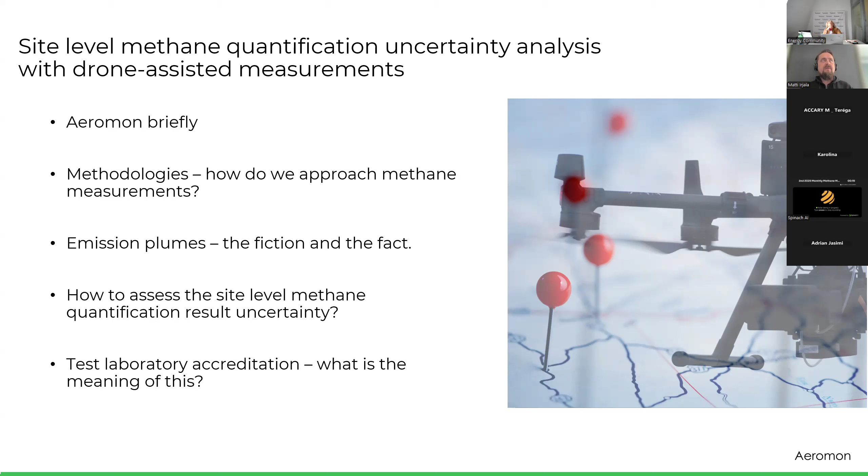Okay, so starting from Aeromon first, briefly. We are a company founded in Finland soon 11 years ago. From the beginning, we started to develop drone-based measurement methodologies and also payload, so analyzer technology, which is light enough that it can be carried with a drone. And during the years, the scope of the industries has varied from maritime to process industries, and now the majority of our work is from the oil and gas industry due to the regulation. We provide measurement services, so basically end-to-end service is possible through us. In some cases, we also work through our partners, but as such, we don't sell hardware, but services. Aeromon holds a certification for ISO 9001 together with accreditation for ISO 17025 test laboratory. And that we will discuss more later on.

Okay, so the reasons why we are typically measuring at our customer sites are that the customers want to understand their fugitive emissions, where they come from. Are they possibly a risk to health and safety? And then, of course, if these emissions can be quantified, this is also done. Typically, the spreading and dilution is also studied in cases where, for example, the odors are annoying the surrounding population. Also, process monitoring is typically one aspect that is studied because the quantification is holistic and covers full process units one by one. So adjusting processes between the measurements, you can get real-time feedback on how the process adjustments affect the actual emissions from that specific process unit.

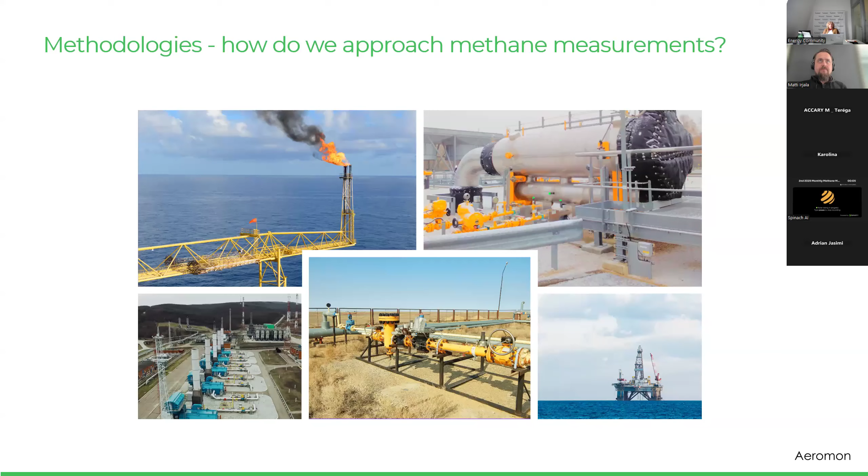Good. Now, let's take a look at the methodologies. How do we approach methane measurements? So, it's very common that the work starts with a mapping. And a mapping is done to understand where the emissions are actually coming from, to identify the hotspots that might need extra attention and might affect the measurement planning or the strategy that we have decided to use in the field for the data collection.

Emission mapping can be done purely horizontally, or it can be done through the emission fence line monitoring, where for example, in tightly built refinery type of environments, we measure in between the units to differentiate which emissions come from which units and so on. This can be further processed to the site level quantification, also section or even component group level quantification, but mainly as an end result, we always come out with site level quantification. Also, the flare efficiency monitoring is part of the spectrum of measurements for methane.

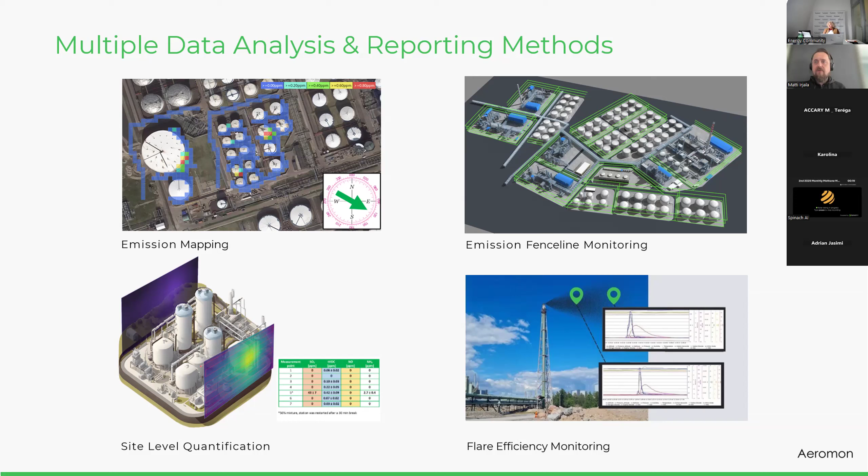And let's first take a quick look on the site level quantification. We can apply two different quantification methods here. The reverse dispersion modeling or inverse dispersion modeling, whichever way you want to call it. This was the first methodology that we ever tested, whereafter we moved to the mass balance approach, which is not a modeling approach, but a direct measurement.

So in reverse dispersion modeling, one needs to know where the source is, what is the type of the source, is it a point source, an area source, or a flare? And moreover, there needs to be some assumptions related to the topology of the source, temperature of the source, the speed of the gas flowing out from the source, and so forth. So there are typically a lot of assumptions.

The mass balance approach is often used instead of reverse dispersion modeling or inverse dispersion modeling due to the fact that it includes no such assumptions. Also, it is a direct measurement of the concentration and wind field, both upwind and downwind of the measurement area or the section that we are quantifying.

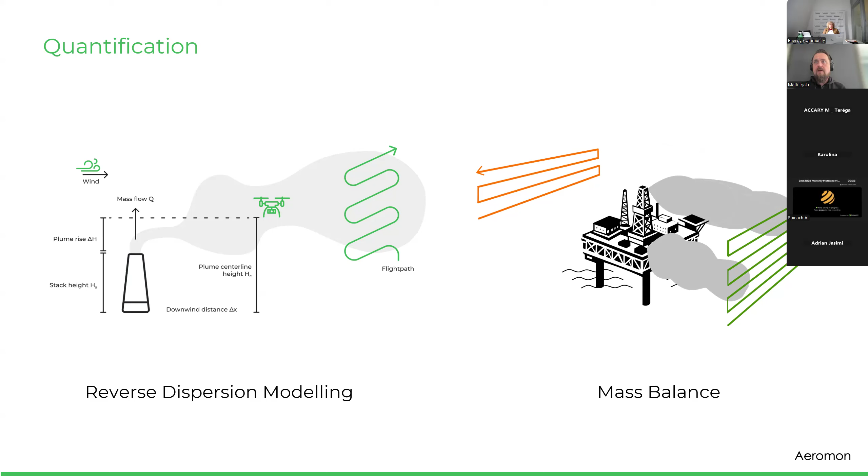The mass balance also goes with other names. It can be called the conservation of mass, or it can be called a flux plane, or anything similar to that. In all these cases, the methodology is a direct measurement of wind and concentration, and it is at the end a mass balance approach.

For flare measurements, there are several different possibilities, also different outcomes. So a straightforward solution is a mass flow rate measurement of methane from the flare. This will result as a simple mass flow rate result. But if that result is combined with process information on what is the methane flow into the flare, this information can be further analyzed into a methane destruction efficiency result from that specific flare.

Also, there's a possibility to do a concentration measurement, which is not a mass flow rate measurement, for different compounds coming out from the flare plume. So measuring methane and carbon dioxide, also possibly alongside other carbon products such as carbon monoxide or non-methane volatile organic compounds can be joined into the same measurements. The outcome of this measurement is the flare combustion efficiency result, which is a comparison of combusted and uncombusted carbon atoms basically out from the flare.

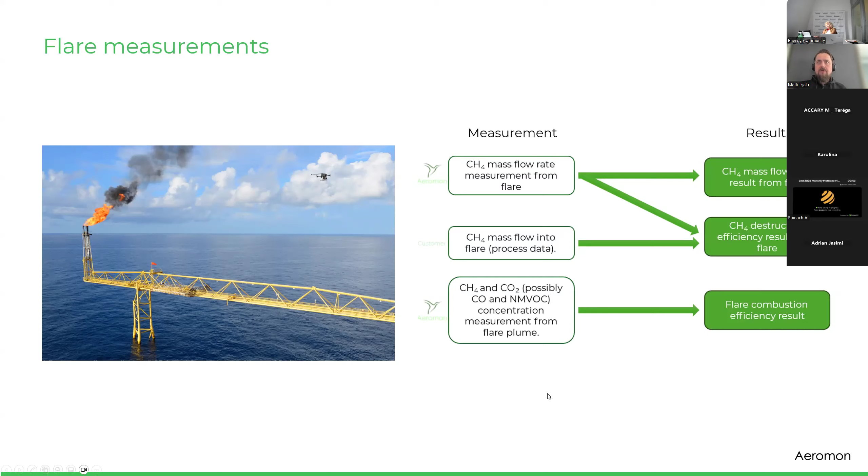This is actually a probability distribution on from where to locate the plume, especially if you are in the near field of the source, meaning that you are closer than a few hundred meters from the source. Moreover, this sort of standard theoretical plume behavior can turn into different variances, depending on the temperature gradient and depending on the wind conditions.

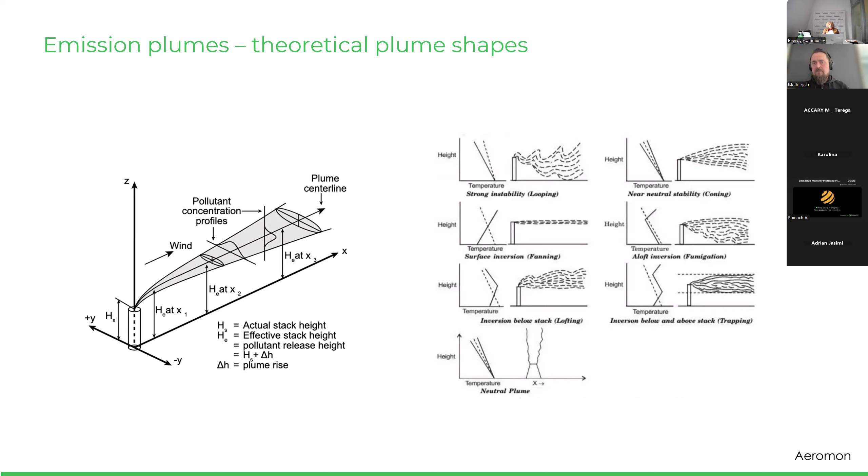So this Gaussian plume can behave as shown on the right-hand side, depending on the conditions. It can be a looping, coning, fanning, fumigating, lofting, trapping, or a neutral plume. Now, when these types of theoretical plumes meet real-life circumstances and turbulent mixing, they start to form out as realistic plumes. So all these examples in the previous slide more or less assume a somewhat laminar flow of the wind field.

Now, especially if we are considering onshore measurements, we have trees, we have geography, we have hills, we have buildings. Of course, buildings exist also offshore, but otherwise the situation is slightly different. But this turbulent flow will cause turbulent mixing. And this is the first step where typically the modeling approaches can turn difficult for the quantification. So the uncertainty budgets and the assumptions needed for modeling in a case of turbulent mixing can be quite complicated.

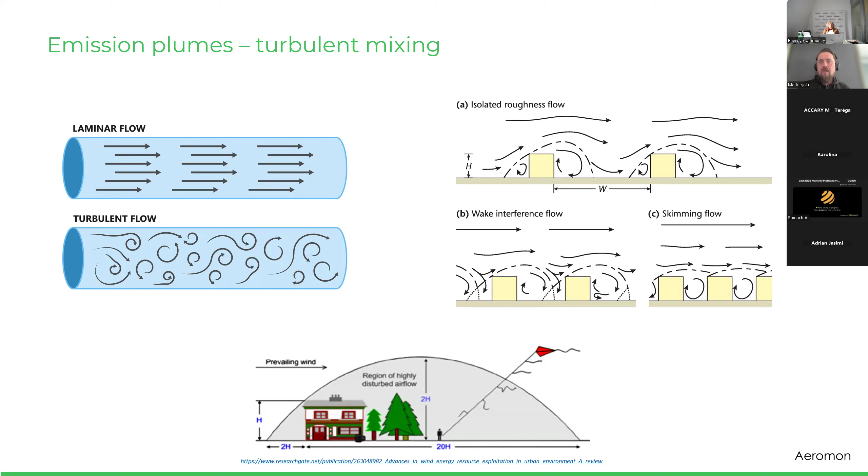Now, when all this is considered, the actual plumes may appear quite complicated. They may appear visually to actually go in different directions, especially in the near field. If we have a satellite view of some concentrations, this is an example of a methane plume seen from space here on the upper right-hand side. And you can see that there is nothing Gaussian about this plume. It's more arbitrary. Of course, it's going towards the prevailing wind direction, but other than that, it behaves in quite a complicated manner.

Here at the bottom, we have a cross-section that we measured from a plume. And this was a multi-source area, not too big, maybe 50 times 50 meters roughly, that included 4 to 5 point sources. And these are just 2 consecutive cross sections of the plumes coming from that area. And from here we can see that the plume behavior is complicated.

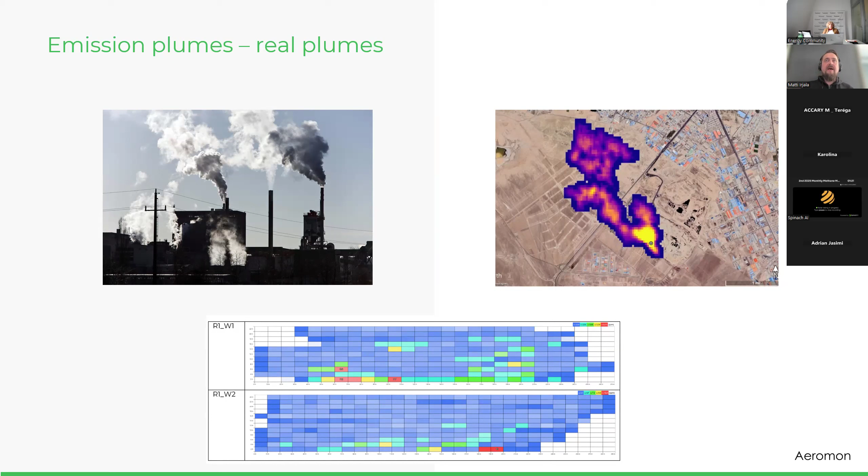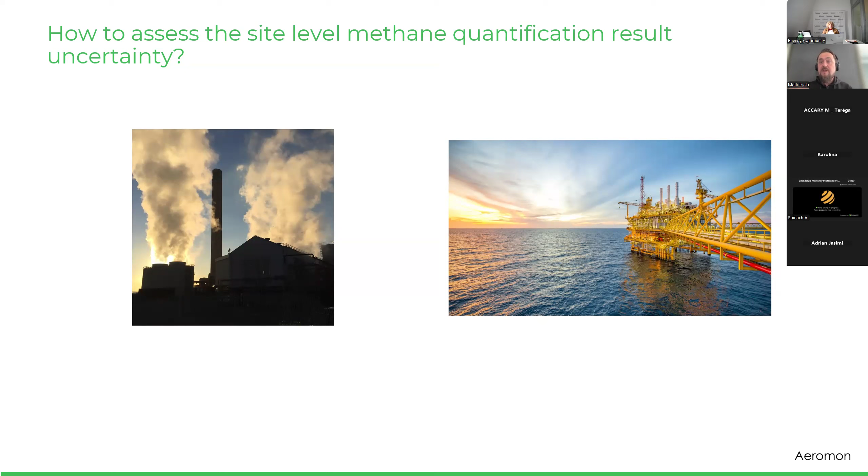Now that we have an understanding of how realistic real-life plumes actually behave, let's start to assess some quantification uncertainty. Because with site-level measurements, it doesn't matter if the measurement is done with a drone or with a car or with the DIAL or with the SOF. With all these methods, what everybody is measuring is the plume cross-section, basically, in one way or another. So all these principles more or less touch all these methodologies, not only drone-based methodologies.

Before we go further, let's just separate uncertainty and accuracy or error from each other. So uncertainty of a measurement result acknowledges that no measurement is actually perfect. And uncertainty defines a group of values that could reasonably be linked to the actual result that was measured in those measurement conditions. So it's a population of results that might be true with the results that we have for that one individual measurement.

Then accuracy is a difficult parameter in the sense that it requires the actual flow rate value, because accuracy is the closeness of the measurement results and the actual mass flow rate at the source.

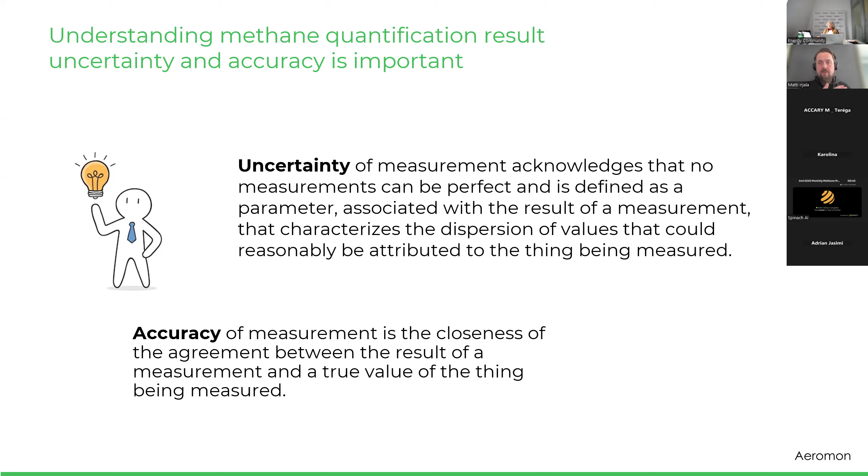This can be also often referred as an error, which is the distance between the reported value and the actual value. Accuracy and error are something that are well present, typically in controlled release studies. However, in actual production measurements, it's not typically available. And there, of course, we then have the comparison between the bottom-up and the top-down measurements.

So as we already saw from the actual plumes, the real-world atmospheric airflow is complicated. And measuring compounds that this airflow carries is not trivial. It's actually quite dynamic. So in order to have representative results and uncertainty that is meaningful to the result, there must be a link between the dynamic conditions during the data collection, during the measurement, and the result. And how this happens is that you actually have to master your entire measurement strategy in order to have that traceability to the conditions that were prevailing during the data collection.

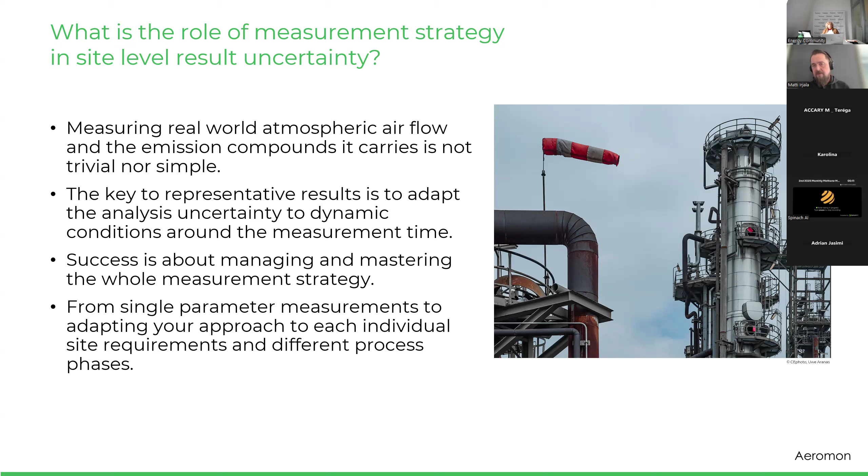And this touches every single parameter that is used for the analysis. And for us, typical parameters that are used for analysis are not only the methane concentration or wind speed, but also wind direction, the location, altitude, and then depending on the measurement details, also timestamp, of course, and so forth. So measurement strategy must be mastered so that one can have a reliable uncertainty budget. This means that there are now two different approaches that I wanted to show in this slide. Let's start with this measurement strategy circle here.

So in order to have the measurements in a traceable manner so that they can be reported in an understandable way, to be well documented and representative, when you're measuring your concentration, you need to have an understanding of what are the movement speed and spatial resolutions that you're using for that concentration measurement. And how do you log your three-dimensional location and timestamp related to the concentration measurements? And then how do you collect your wind data related to your concentration measurements? And what is the sampling rate of everything that you're measuring?

How do these relate to the source area that you are trying to quantify? And what is the process phase in the process area? Is that process phase representative of the actual yearly emissions, or is it possibly an anomaly at the moment? All this needs to be continuously handled during the data collection. And as we all know, it all starts with a plan.

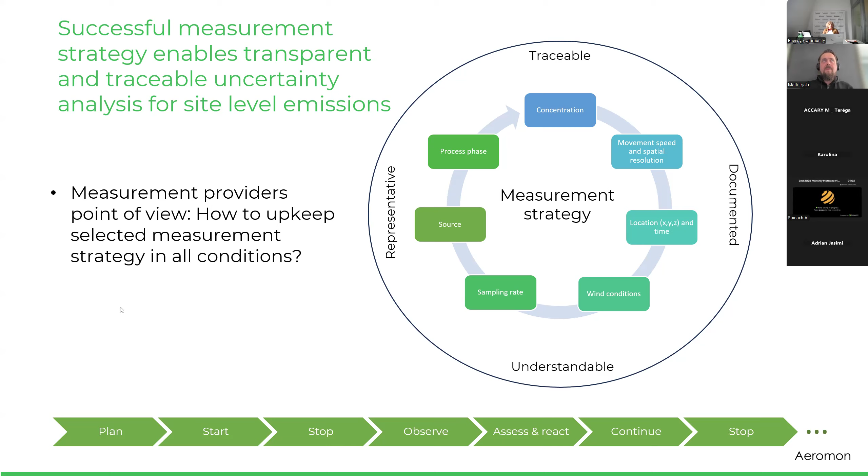Now, the factors that affect the site level quantification result uncertainty. In our case, we have chosen to follow the principles of the CEN technical standard 17660-1 for the concentration measurements. And the reason is that this is the only available technical documentation for sensor system uncertainty definition. It doesn't actually cover methane, but it's the best available standard for this task at the moment. So here, it means that we actually perform performance tests on our analyzers and sensors frequently.

We also have accredited reference gases in our laboratories, which we use to compare the small field calibration cylinders, which we can then send into the field. So in case we need to do a field calibration and test the calibration levels in the field, we still have the connection to the accredited standard gases in the field with us.

Then, in addition to this expanded sensor uncertainty, what affects the result uncertainty is the concentration level in relation to the system detection limits. This means that the closer we go to the system detection limits, the higher the concentration uncertainty actually is. So this concentration uncertainty is not a constant value throughout the measurement range, but actually the closer we go to the detection limits, the more this uncertainty grows.

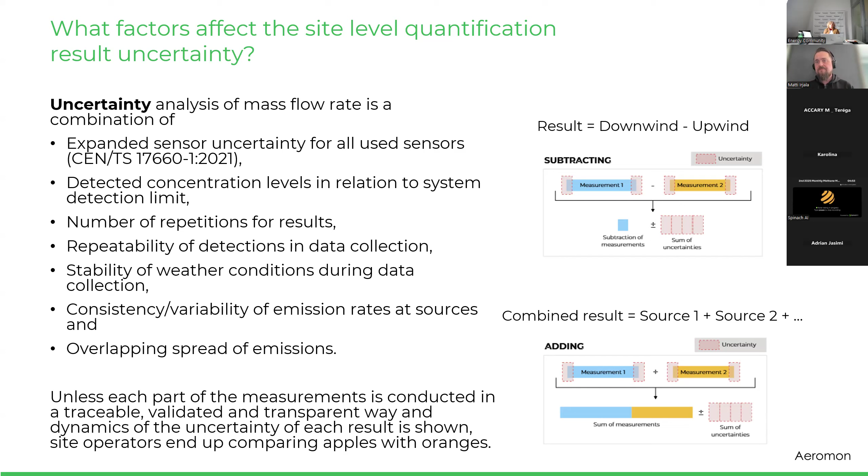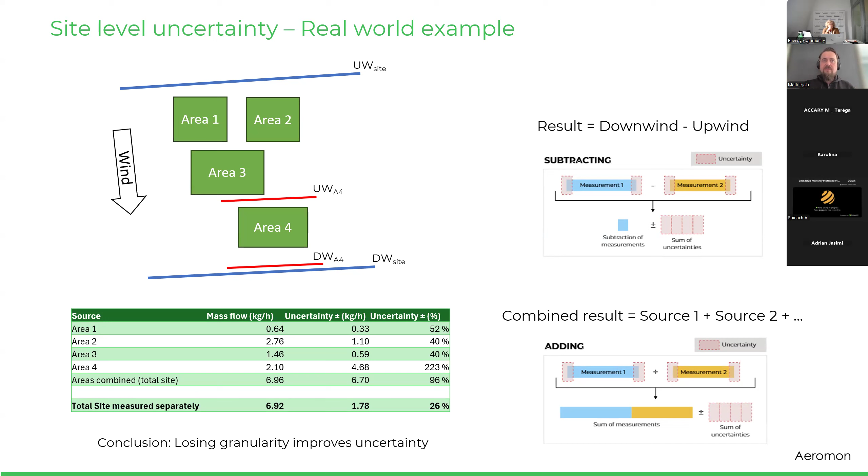And now, if we compare that to the analysis where we measure the entire site as a whole, we can see that the actual mass flow result is the same, but now the uncertainty is 26%, which is a quite typical uncertainty level that we get in normal conditions. So the conclusion here is that in quantification, losing the granularity improves the uncertainty. However, as we well understand, there must be a compromise between them.

Because if we want to improve the site level reporting and get as much value from the site level quantification as possible, you should also have visibility to the source areas and understand the fraction of emissions from different sources. Because if the reconciliation shows that there are differences between the bottom-up and top-down measurements, having this visibility can help a lot in understanding which sources are the reason, and whether these sources are, for example, variable. Of course, it's always beneficial to have synchronized bottom-up and top-down measurements in order to mitigate as far as possible these variable sources and such behavior.

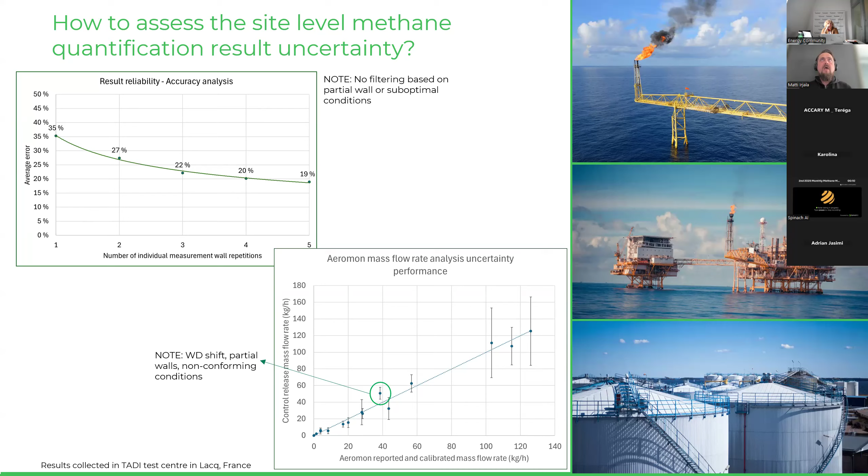Now, what is the meaning of accreditation in relation to the uncertainty assessments of the site level measurements? In Aeromon's case, it means a continuous collaboration in research projects, which has been very essential for us to build a track of evidence to show that we are able to continuously improve not only in results provision, but also in the realistic uncertainty assessments. We also have an in-house team of atmospheric physicists who work continuously to improve the methodologies that we use.

But here you can see a quick glimpse of development during the first years of the mass flow rate quantification, starting 2021 from this GERG study, where we were heavily overestimating, moving towards the next year, where we were not too heavily overestimating anymore, and the number of results meeting the real value with the uncertainty budget was notably increased, but still maybe not as good as it could be. Whereafter moving forward, getting much better fits and also much better meets of the uncertainty budget with the real values. And then moving, of course, towards the image I showed you in the previous slide on where we are today.

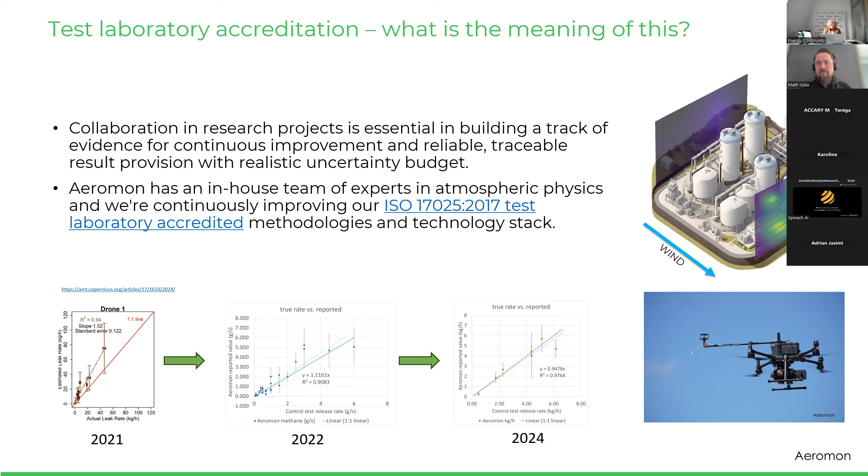The laboratory accreditation that Aeromon has includes measurements of such parameters as location, and then gas compounds such as carbon dioxide, for example, methane, and many others. Then wind speed and direction, ambient temperature, pressure, and relative humidity. And then the results that we derive from these. So direct results such as concentrations or wind speeds or wind direction, localization of emission sources, which is of course an interpretation of data, mass flow rate quantification, then the combustion efficiency and the methane destruction efficiency from the flares.

And when a service provider is accredited, it means that the reporting is audited and validated by a third party. It also means that all the methodologies that are utilized in order to collect the data for reporting are also audited. The reporting is quality controlled, representative, and traceable. It's transparent and as reliable as it can be. That means that it's accredited.

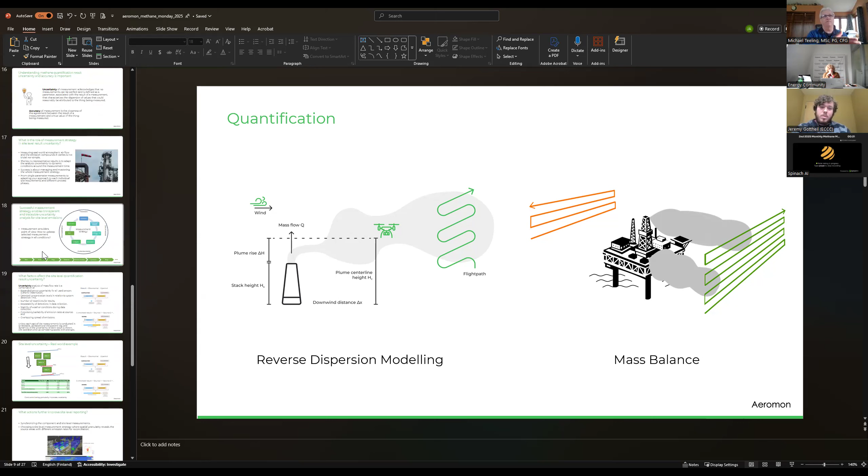The question I have is, coupled with the planning, using the correct sensor type. For the analysis you've performed here, is that based on tuned laser spectroscopy, so more of a passive sensor, versus an active LiDAR sensor? Because one of the things we've done most recently, and I'm not at liberty to divulge the location, I believe someone used the incorrect sensor. The conditions were not right, and the reconciliation was literally impossible. Led to no overlap. So could you speak to sensor type choice?

Yes. So at Aeromon, we decided from the very beginning that we are sensor agnostic, which means the hardware we developed is more like a universal sensor platform. From the beginning, we have tested all the available methane sensors that we could consider for a sniffing method, using a sample pump, extracting the sample, introducing it to a sensor, and measuring the concentration. We tested NDIR, metal oxide semiconductors, and around 5 years ago, when tunable diode laser spectrometers started to miniaturize, we tested them, and the combination of detection limits and selectivity is why those have mainly been used by us since then.

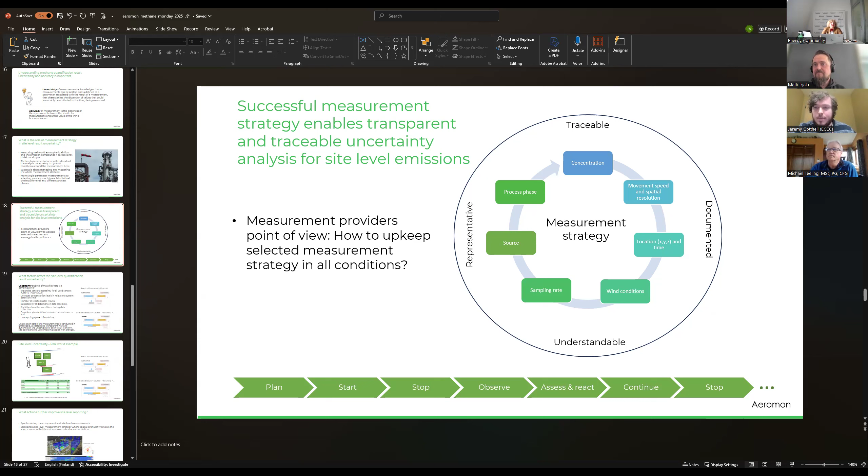Appreciate it. Thank you. Yeah, thank you. I have a few questions actually, because after Jeremy and Michael asked the really expert questions, I have more like beginner's questions, just to clarify.

So in all these services you're doing, different types of equipment are used, I believe. You mentioned drones, but as a service provider you use them all, not just drones? Yes, that is exactly correct. This universal sensor platform that we have developed and use in our data collection is something we can carry with a drone. However, drones for us are just a sophisticated ladder, if you may. We can use bicycles or extension poles, or we can collect data just by walking.

The measurement equipment itself doesn't know if it's carried by a drone or by a human hand. It just collects geospatial data with a timestamp. So yes, we use the sensors for the data collection. We use weather stations: we have a stationary weather station, and if we use a drone, we have an additional weather station on board the drone too, so that we understand the local wind field better. It's also used for the mass balance analysis, but we provide all this.

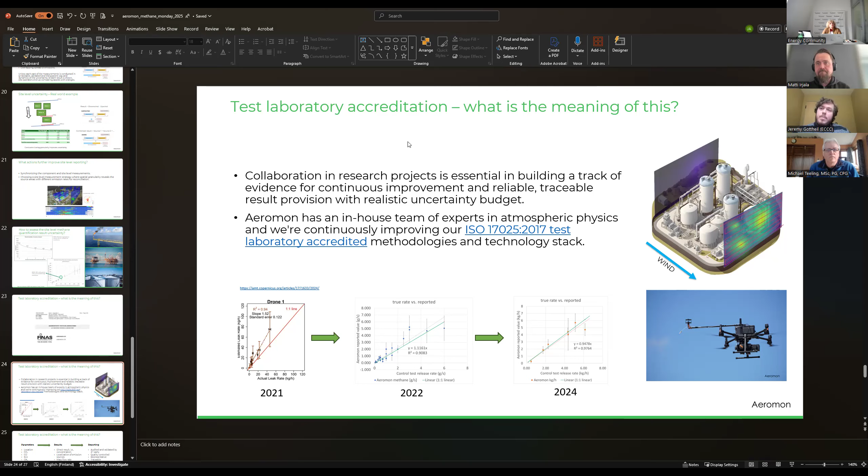Thank you. And then one more question for beginners like me. So it's possible to measure different gases in one go? Yes, this is correct. And then to see what is methane, what is CO2, and so on? Yes, correct.

The universal sensor platform that we utilize in the data collection, it is quite typical that in these types of methane measurements, we have the methane sensor that we accompany with a carbon dioxide and carbon monoxide sensor, because we use them in one and the same dual module. And moreover, we can put in the non-methane volatile organic compound sensor in case there would be potential for longer hydrocarbons than methane on site.

And when we are doing the data collection, all these different parameters are measured similarly over the entire same area. So we can, in theory, depending on the platform model that we use, carry 8 to 16 different gas components simultaneously. It really rarely happens, but in theory, we could do that. I think the record is around 8 parameters, and this is from the process industry side where there are very complex chemistries happening in the factory that we were measuring.